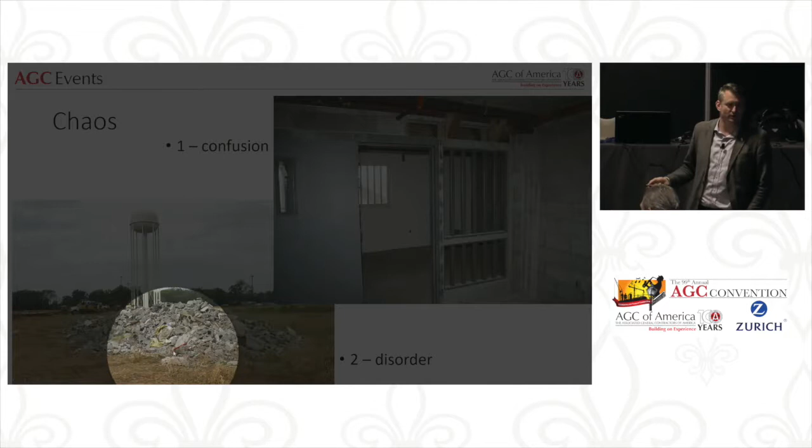Now, chaos is something that creeps way into every one of our projects all the time. So what are elements of chaos? Well, why in the world would you go and dump all the bricks out on the ground? So what is the chaos behind that? There had to be some reason behind all of that. And then to some degree, that's disorder, and then confusion, right? How was this really supposed to go in? I mean, you can tell by the bars, this is a prison, and so how this is put in is fairly significant, because if you do it wrong, somebody might die someday.

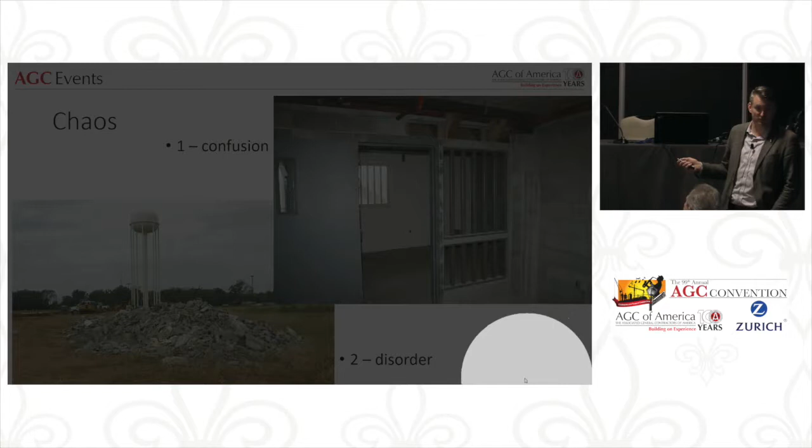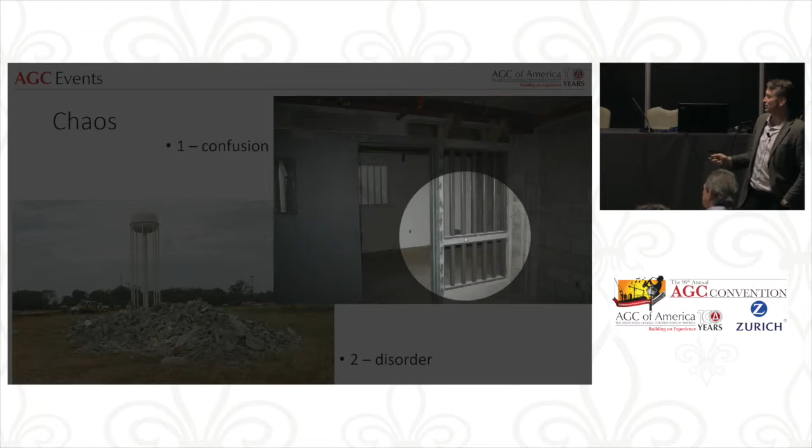So there, just what's happening that all this kind of gets left out and put together at a later date. In here, the simple part of the confusion was this window is backwards. The glass is supposed to be on the other side of the bars. And that's a big deal if that's a safe room. So if there's a riot in the prison, that's where the counselor and the guard hole up for 24 hours to get things under control. So yeah, it's a big deal.

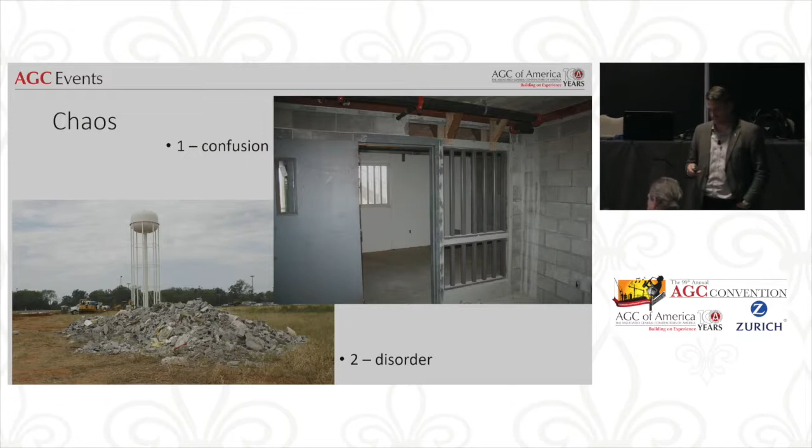So how do we start to get past the chaos and the ignorance? And really, I want to focus on the chaos and ignorance, because I want us to get that goal of having order and understanding, of being able to do things. So if you look closely, at first glance, you think that might not be what was desired. But in reality, that had to be exactly what was asked for. In this case, you had to have an owner that specifically wanted that window.

And how do they communicate that? How do you get that one-off thing in the building when you've got 40 or 50 workers that are all going to look at that? They're going to look at the plans and say that's wrong. They're going to look at the hole and say that's wrong. But that's really what was wanted. That takes order to be able to do those special things.

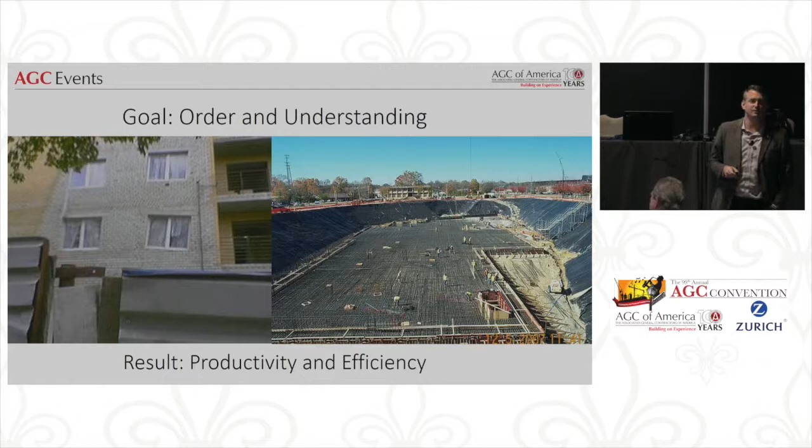And then productivity and efficiency. How much concrete are you going to pour that day? Are you really going to get away with a 6,000 yard pour? Are you ordered enough, and are you organized enough to put that together? And so in order to get to that, that's what we're going to talk about.

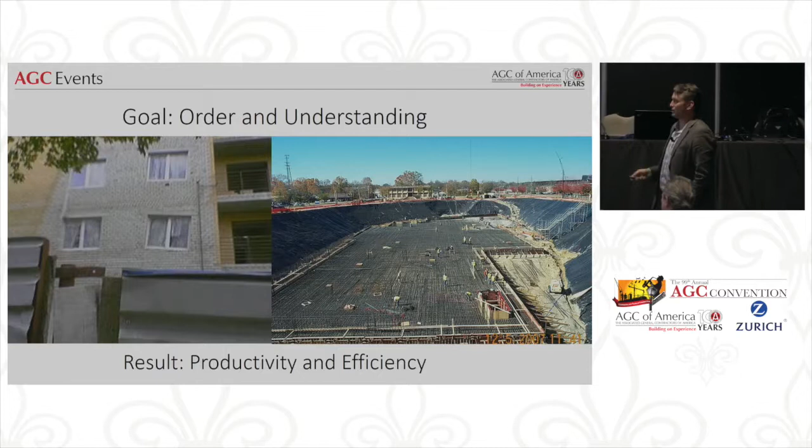We use BIM to increase our accountability, making sure everybody is getting us the right information. Now, how do we really do that? I want to address some of the little tricks and techniques out there that make the difference. We also want to increase general contractor and trade profitability. That is somewhat tailored to this crowd today, but it's also the general goal of all of BIM, VDC, Lean. That's what we have to be doing to make a difference. And how do we use BIM to avoid common legal problems of the past? That's also usually about avoiding chaos and ignorance. So those are the main goals I'm after.

Let's talk about how we go out there and build great buildings, whatever that role is. The company I work for does heavy highway, and we also do industrial. BIM is most applicable in a commercial environment, so you're going to see most of my examples from there, but it carries over into any element in which we are building, constructing, creating.

The architect, okay, that's usually one of the first ones. Others? The trades, subs? Any trades? Come on, where's the owner, and the trades are supposed to say the general contractor, right? We get in these arguments with each other.

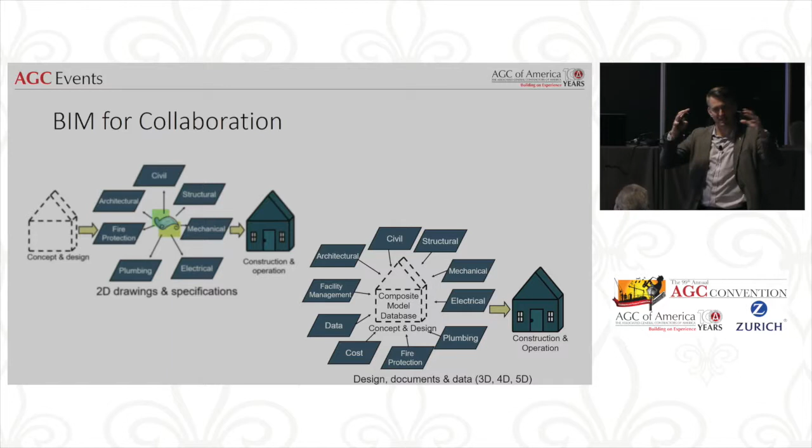Those slides are straight out of the AGC BIM classes, that's where those come from, and that's the guiding principle we're after behind all of this. So you can already see the idea of collaboration. When we take the distinct information and kick it out in different directions, we're already creating chaos and ignorance. We're separating this information and everybody's not together. So the idea is, let's start pulling it together.

But BIM is really a process that hopefully starts with some degree of schematic, and then you're hoping that your design team is actually authoring their design using the model. But there's a little step in there, and there are some diagrams I have to walk through for that.

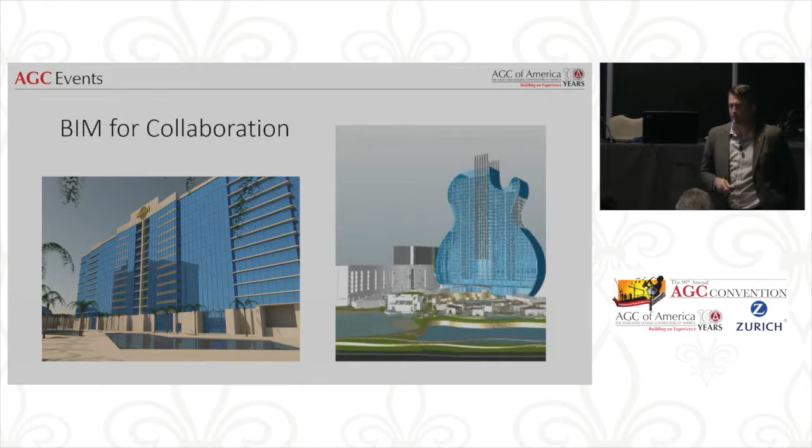We're talking about early on projects. If you have a vision that might not be easy to explain, or might be hard to truly understand what the product is, go ahead and model it. Now I found the vast majority of owners I deal with don't have experience reading plans, looking at plans, and getting a vision out of those plans. And so that means most projects need to be modeled, because that way they can actually see it. By modeling early on and creating that vision, we can easily reduce owner change orders by 50-60%, pretty easy up front, because they find this stuff early. And I'm going to talk about boundary of realization and things like that as we go.

Okay, here's a video that I'm going to play.

If we're talking about working together and collaboration on a project, if you're going to be stepping into BIM and you want to change the productivity in your job sites, you need to be doing 4D scheduling. If you're a trade contractor in here, you ought to be asking for it. You ought to be saying, do you have a 4D schedule? Do you have something to show me where this and how this goes together?

Because in the time it would have taken for me to even pass out half of the schedules for this project to you, to even pass you the pieces of paper, you already have a much better understanding of this project than most people would have ever had with paper passed out. You're already seeing the flow, you're already seeing how it's coming together. Now you can dig into this that much faster and easier, and actually start to truly understand a schedule.

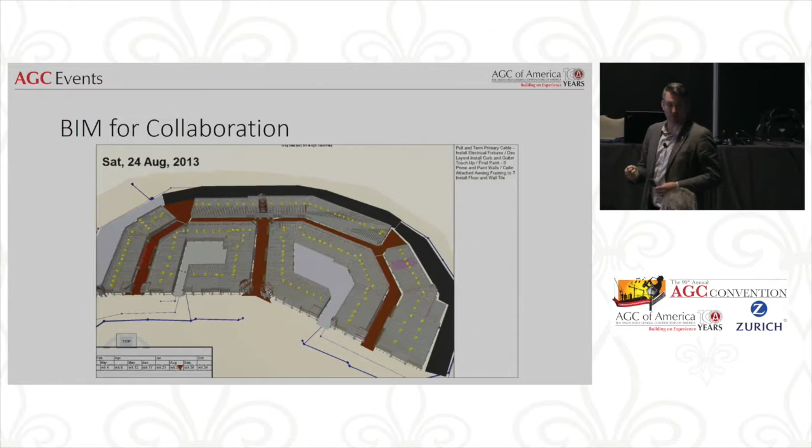Now that is a big part of fighting chaos and ignorance on a project, because most people on a project have no idea how their work relates to anybody else on a regular basis. There might be a superintendent somewhere, for that mechanical trade, who gets it a little bit, but this is something you can show every orientation meeting and get everybody out there understanding, at least in a general sense, what the flow and scope of the building is.

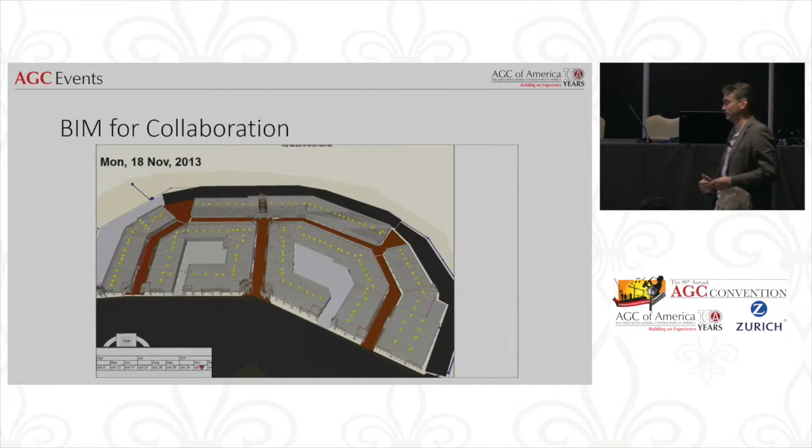So it's a really interesting study on how... This particular one is taking that same 4D schedule and taking snapshots in time and dropping them into VR, into an Oculus Rift or something like that, where someone can walk through and see what the project looks like at that point in time. Now we do this sometimes for specific clients, but we're looking to expand this even more. Some clients just need their building done. This particular client, we were coordinating on a major operating facility on a site with lots of stuff going on. There are times when this little road looks like an interstate.

And so we get to lay down here and build over here. A snapshot in time - what I did is I took a particular day, their known busiest day of the year, and showed them this is what we anticipate your site looking like on the busiest day of the year.

And what was the first thing they said? They came back and said, hey, that bridge isn't tall enough, the stuff we have to drive under won't fit. And I said, perfect, that's the exact sort of thing we want to know a year and a half before the project starts, not 2 days after we've erected this and something goes bump, because no one would have ever seen it on a 2D logistics plan.

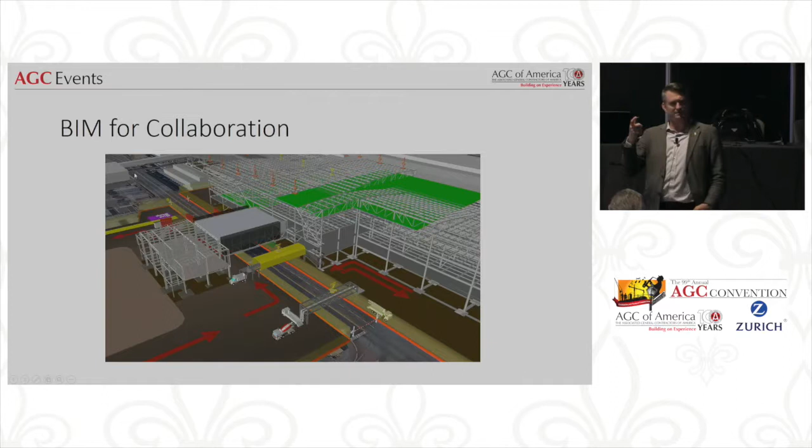And no one would have ever seen it here unless we dropped into that virtual reality. I was actually in virtual reality, standing on the road, walking underneath there, and said hey, that doesn't look right. And we got it taken care of.

So that's collaboration. When we get into trade contractors, so many people think BIM is just the architects and engineers. But when you start getting trade contractors and steel involved, this is coordination between structural steel and bar joists - two different companies providing two different things.

There was a bust in the height, right? So internal trusses, small frame members were not tall enough and would have put it all here, when it was really supposed to be here. But because of modeling - this had gone through a shop drawing process as well, but because of the modeling - we caught that before anything's fabricated. That saves a bunch of time and effort, because it's just better to catch it when it's virtual.

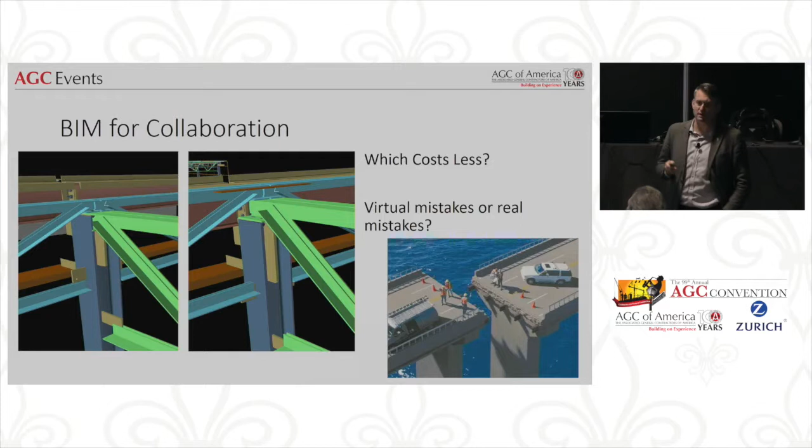But that involves pulling it all together. So this idea of collaboration, it's got to be all of these groups coming together to really make it VDC and to make it work.

And that's part of the difference with BIM. BIM is often viewed as that product - oh, we have a model, we're great. And I often use the analogy - I didn't even put it in the slides this time, but I usually do it - having a model is like having a treadmill, right?

You have a treadmill, does that mean you're in shape? I know lots of people have a treadmill and they don't ever use it. I know lots of projects that had a model and they don't ever use it, and it doesn't do them any good. So the idea is to try to pull all of these groups together and center them around the idea of virtual design and construction.

So that's the idea of taking this accountability and pulling it together. Let's walk into that a little bit. If we're going to fight ignorance and chaos, one of the big results that comes out of that is accountability. Who is providing the information? What information are they providing? When are they providing it? Walking through all of that sequence starts to become very significant and very important.

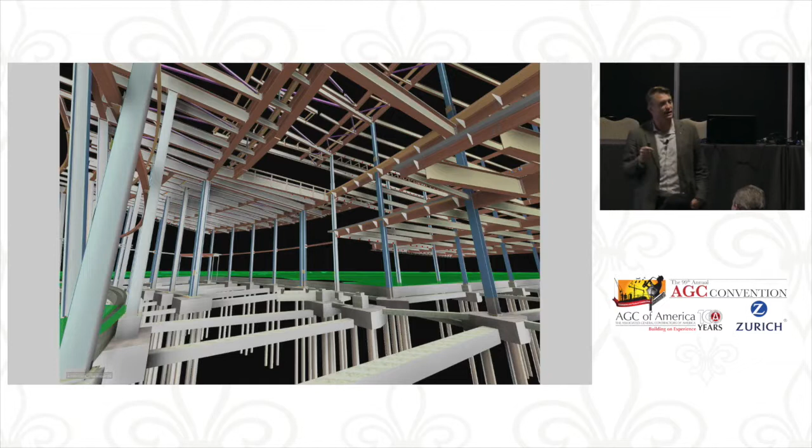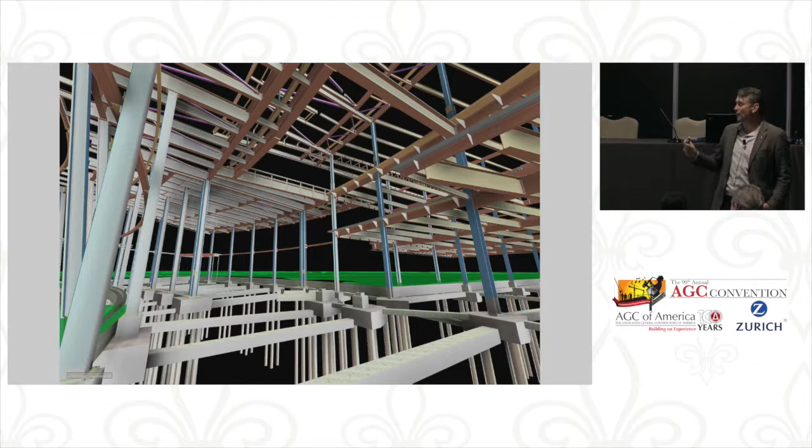On top of that, I am dropping a structural fabricator's model. Yes, I had the structural engineer's steel, but to be accountable, I want to see how the structural fabricator interpreted that. So I drop it on top, and now I'm talking about anchor bolt locations for a concrete guy, making sure that's coming together.

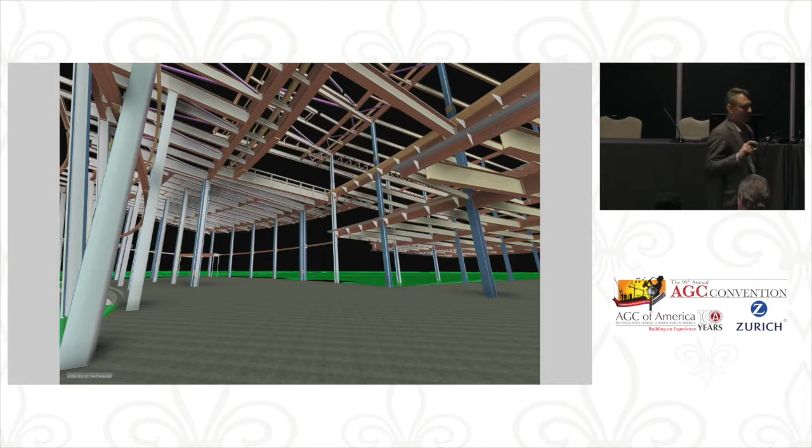Next step, put a slab in. Usually not too difficult, not a lot of thicknesses here, but I have seen models save people's hide on the classic issue of quarry tile in a kitchen. Because the architect always shows quarry tile in the kitchen, and how often does your structural engineer actually go into the slab and show the 2-inch recess? Then it gets poured without the 2-inch recess, and the jackhammers come out, and everybody's mad at each other because there wasn't the communication.

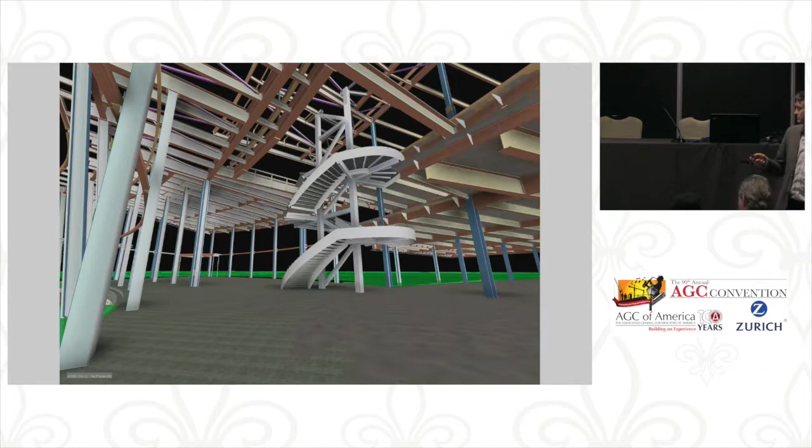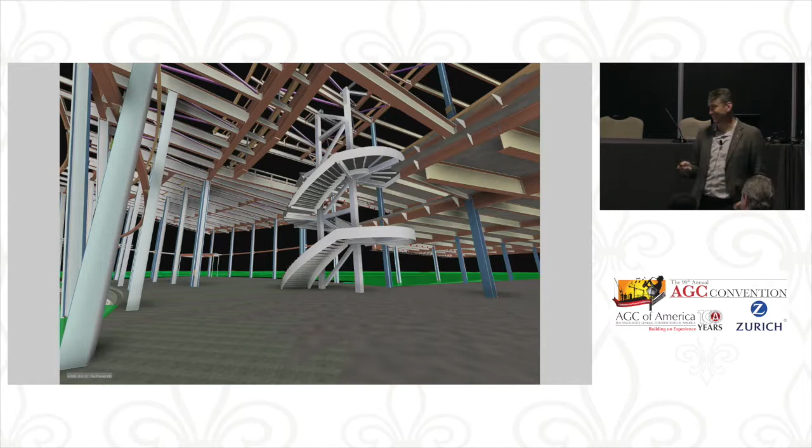Next item, there we go. This is a different fabricator. The circular staircase comes from a different fabricator, in this instance, than the structural steel did. So we want to make sure - a miscellaneous metals guy, it doesn't seem very miscellaneous, but it was miscellaneous metals.

Ductwork - actually the fabrication, not the engineer's model. In fact, the engineers on this project, structural and architectural models were provided from the design team. No MEP was provided.

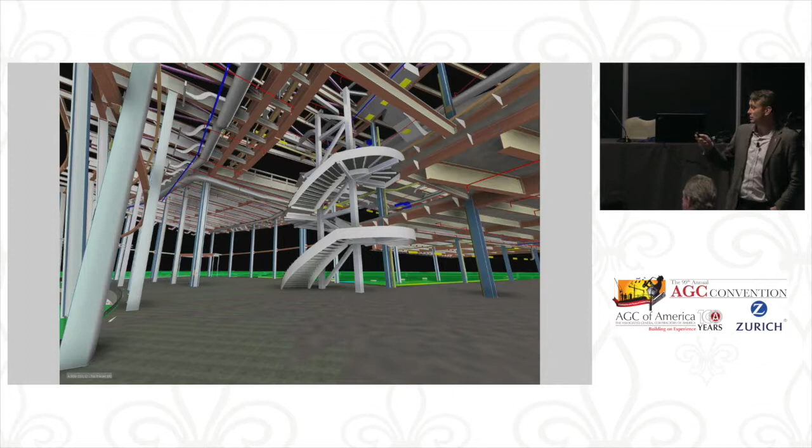So we just went straight to the trade contractors to get all of their models. There's your fire sprinkler added in, electrical, and then your curtain wall, which on this particular instance was a very significant factor. Modeling the curtain wall made a big difference. It was interesting on this particular project, the structural engineer, someone was saving some money.

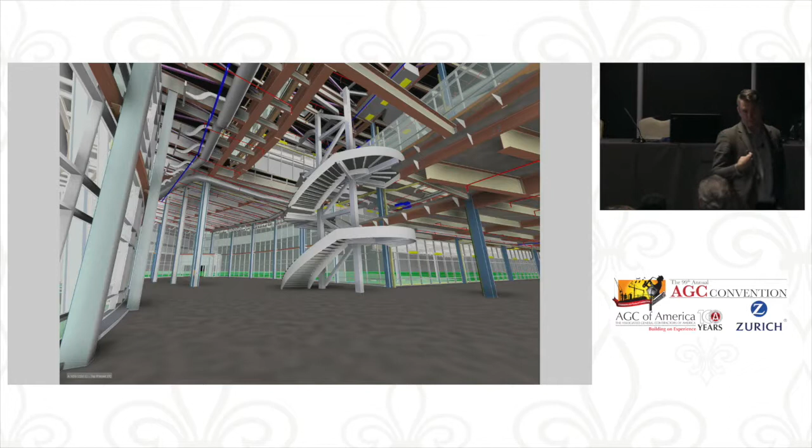So what they did to save some money is they were attaching the curtain wall to the steel. But when you attach the curtain wall to the steel, after 4 or 5 stories you have this expansion that takes place. So they put in a horizontal expansion joint all the way around the building. Has anybody in here seen that before and built that? I had never seen it before, I had never built it before. It threw some flags when the modeling happened.

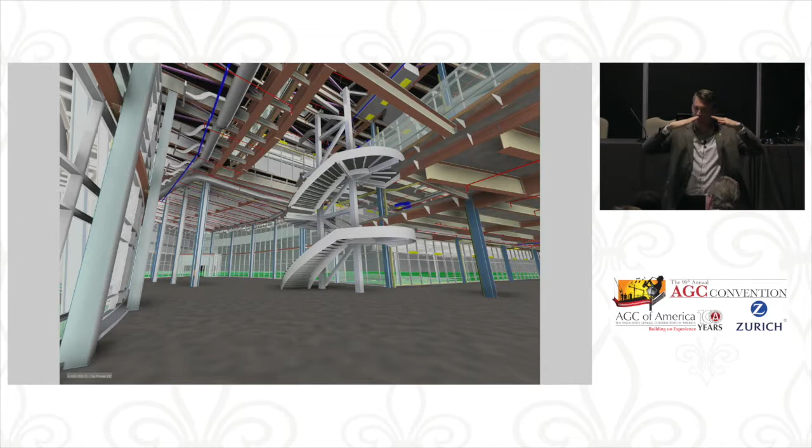This had been in the plans, and nobody really questioned it, it's just an expansion joint. Turns out you can't do that with curtain wall. There's no known way to do that. So we had to come back, pull that out, redesign, and put in extra steel that accounted for the horizontal attachment, and that's what the expansion joint was attached to, the beams that went around the edge of the building. And of course, beams at the center of spans, you have to allow for deflection. Well, curtain wall, even if you put the joint in there, you can't deflect glass. It goes boom, and so that was a big deal.

This particular project, we had the laser scan, but not as an as-built condition. I do not promote that. If you're talking about the future of BIM, right, I want to get it right when it first goes in. If I'm laser scanning to see if it's right, well, I've already killed my productivity. I've already put it in wrong, and now I'm finding out it's wrong, and now I'm fixing it. That's no different than what we used to do.

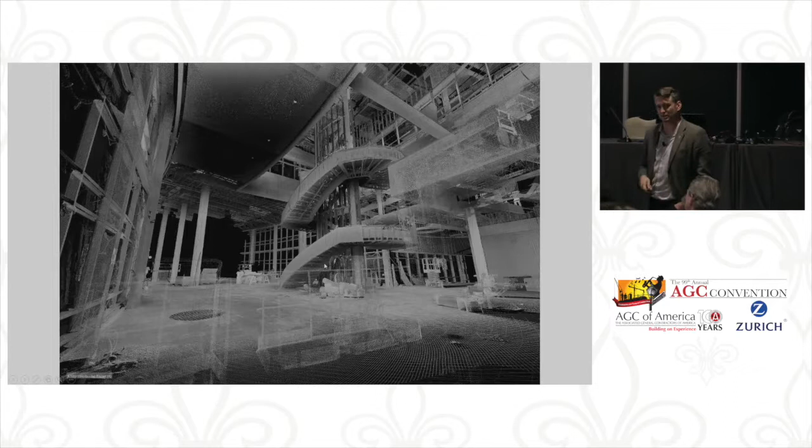What I want to be doing is using the models, and I have some slides addressing how I think that's a better way to do that. This particular one was scanning these studs to put the fancy fiberglass coating on them, which made the stair tower really neat, you'll see that in just a second. But they had a little trick.

So a trade contractor here, they were trying to play off the chaos on a project. What they would do is say, we have to have our attachment points for our fiberglass panels accurate within 1/8 of an inch, knowing that the tolerances for all of this is 1/4 of an inch. So they knew that the tolerances would never be met, and they'd never know what it was, and they could then always come back in and prefabricate a bunch of panels.

So we laser scanned it, and we gave them the models, and we told them, we laser scanned to a density that provided all your tolerances within 1/16 of an inch. Here you go, here's every measurement you need within 1/16 of an inch. And that's how we found out they were playing a game. It's because they'd already fabricated a bunch of the panels, and then they tried to come back and say, no, we gave you your tolerances, we gave it to you. And they'd just been doing that. So they weren't very happy with us, but they'd been kind of gaming the system.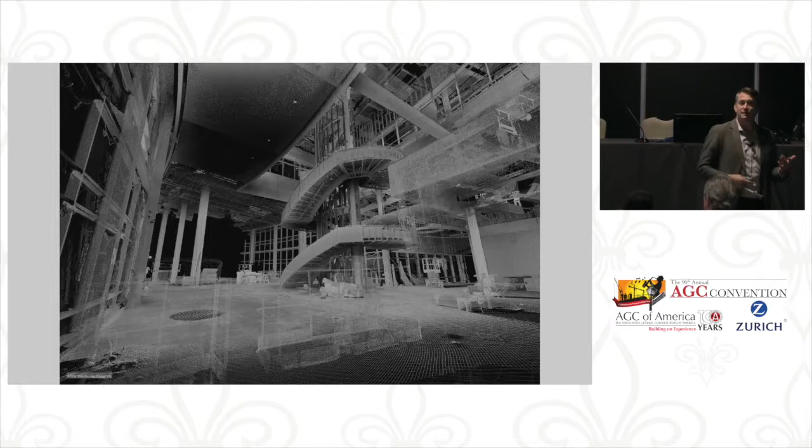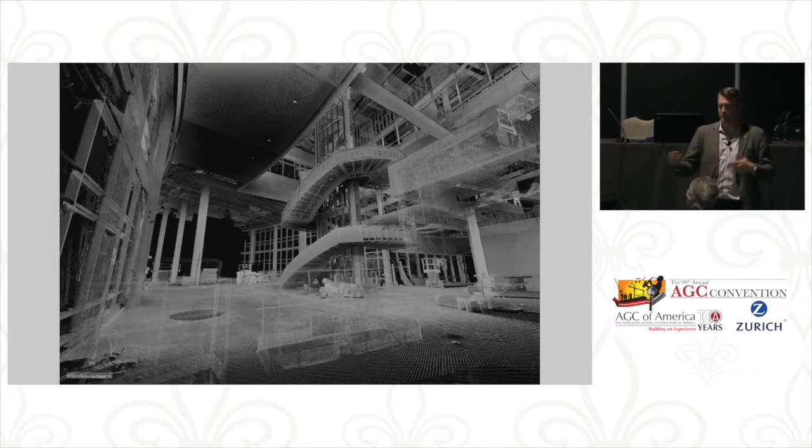Their regular mode of operation was about 50% waste on fiberglass panels. They would just produce them and then reproduce them. That's the exact waste that I want to reduce, get rid of, and make our projects cost less. So when we're said and done, that's the product we're producing. And you can see that stair tower is really pretty neat, it's a pretty fancy deal.

So now, that's part of the accountability, is how do we get all of those individual partners. I went through that, I talked about a couple different trades and making sure we have their information, their interpretation, and it's right to go in. So the idea, and workflow is very important, people skip steps all the time. Even my own folks within our company, I've got to walk them back through it.

Okay, if we're doing this right, the architect, we want that architect doing a model-based design, not creating a model for drawings, right? Because if they tell you, oh yeah, we have a model, here are your drawings, it's like, well, I want the model.

Well, we don't know. That means they haven't been reviewing the model. That means they don't even know what's in the model. And that happens on a regular basis.

You've got to be talking to them, and we've got to be moving our architects as a whole. That's why I come do these presentations. If every one of you go back and talk to your architects, that's 120 conversations less I have to have next year, right? So go talk to them.

We want model-based design, where the model is authoritative. Now, oh, it's not a contract document. It can be—they just have to get over that. And it can easily be. All that can be taken care of. But the architect doing a model-based design.

Then we want civil to be doing a model-based design. Now, how often can the civil guys come to you and say, oh, we don't do BIM? Wait a second—like 80% of the civil market uses Civil 3D. It's a 3D model. It's already there. Don't let civil people tell you, oh, we don't do BIM. Yes, they don't use Revit. That's okay, they don't have to use Revit. You just get their Civil 3D in a 3D format and you're set. So ask them for model-based design as well.

It's circular, right? You're going to run these through. You're going to get them in pieces. You're not going to wait and do the entire project. Pick the area that's first on the schedule, run it through, get it coordinated, move to the next one. Some systems, like fire sprinkler, always have to bite off a little bit bigger chunk because there's hydraulic calculations and sizing pipe and everything. But they're used to that. They'll be okay.

All right, so when we start going into this, you can have a simple disclaimer from the architect on their model. And I implied this a little minute ago and led to it: no warranty, express or implied, fitness for any purpose, or that the digital model files will be usable or accurate.

Why? So what are they doing? They're actually, okay, so let's be collaborative and let's not have the tug of war and sit here and poke fun at them like we always want to, right? They're doing what all the software vendors have been telling them to do for 15 or 20 years: use the model, produce your drawings, because your drawings are your deliverable. That's what you're contractually obligated to provide. That mentality is wrong. We need to start changing that.

They're not contractually obligated to produce drawings, because if that was only the obligation, they would just provide us with a title block and a little circle that says build here. No, there has to be a level of quality and coordination information in those drawings. And so the model is a more effective way to produce that. We just need to get them doing that.

So these disclaimers are a great example. If you get the disclaimer, you know you're not quite where we want to be yet. And I would say only about 10 to 15% of firms in the U.S. are at this state. So if we start talking about the future of BIM and VDC, I want to see reliable models coming from our design teams, where they're actually using the model to design. So if you go to Autodesk University, they're going to talk about generative design, where the computer is basically designing it. Well, then you know it's reliable, as far as the programmer goes, but we'll see.

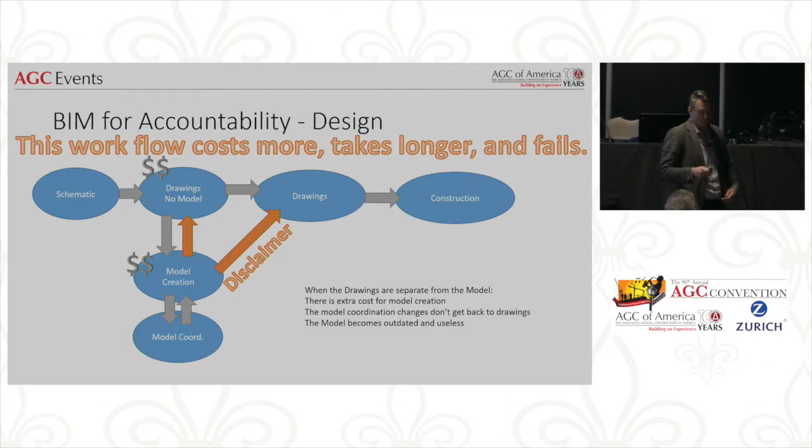Because they'll make all of these changes, we'll do all that coordination, that process I talked to you about, but none of those changes—no one ever looks at the model, then goes back and fixes the drawings. And so it falls apart, and that's what the orange arrows are. The disclaimer is a good indication that that's what you're looking at. So, that's Wile E.

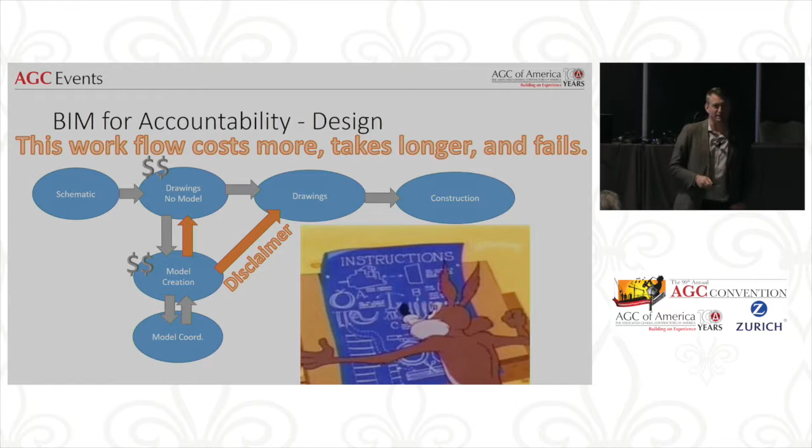Coyote stage planning, and we know how well he does at everything.

Now we have architects and engineers that are getting a little bit better. They're making the next step, actually creating the model, and you can see they're not spending double the money. So they're actually making themselves more productive.

They're creating the model, and the drawings and the model are almost the same thing, but they're still issuing a disclaimer, and that comes back because they're not reviewing the model. They're building the model, creating sheets, handing the sheets to the principal of the firm or that senior designer, the senior architect, and they're reviewing the sheets. Yes, this is a quality product, a quality set of sheets, and they send it out the door, and they will give you the same disclaimer.

So then what happens is we get here and it fails, because then we start doing coordination and we come back to them and say, hey, I noticed in your model that all your toilet paper dispensers are halfway through the floor, down at that elevation. They're like, well yeah, but that doesn't make a difference, it's just in the model. It's like, well, but we're intending to build off of the model.

No, you can't use a model for anything. Okay, well then we were going to coordinate off of this. Well no, we know that all the diffusers are at the wrong elevation. It's like, well, can you fix it? Well, no. Okay, so that's another sign. The disclaimer is what gets you there, so watch out for it. That's where this one fails.

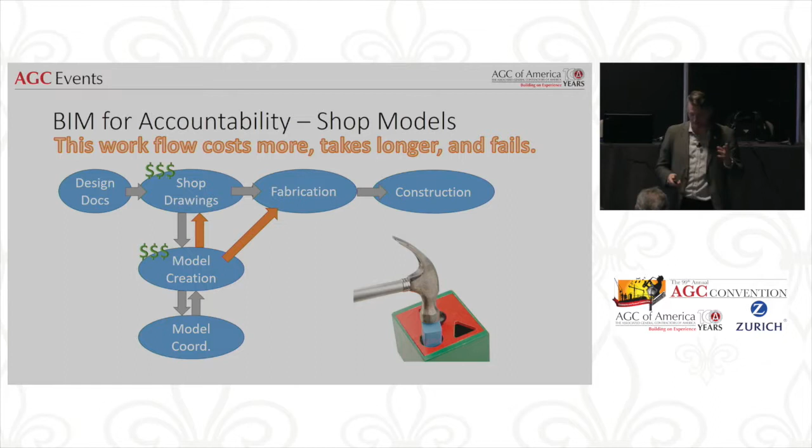So shop drawings, some of you might have used models or not. If you haven't spun models around, it is very hard to pull dimensions from the model, because you're there looking at it wondering am I really hitting straight to each other, am I really at the closest point? Some tools will tell you closest point, but it's really hard. Whereas a set of shop drawings or actual construction drawings, those lines are very clear, they're called out, it's easy to build from those.

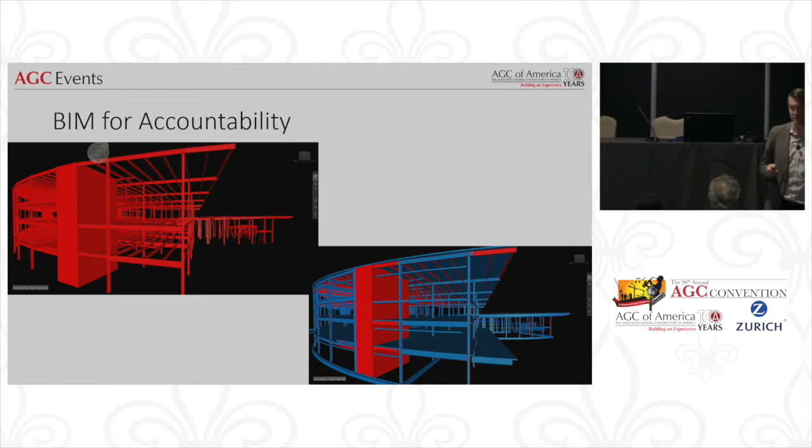BIM for accountability, another one here. How are we making sure everybody fits and everybody works? The design was fine on making sure everything fits.

This is a research lab, and they had about 64 ovens at any given time in here testing ovens. If you've ever done a kitchen hood, here is about 32 kitchens all backed up against each other with all the associated ductwork. On this particular one, there was a big fight early on: model the hangers, model the hangers. No, we always just put the hangers in, we always just put the hangers in. When it came down to it, HVAC was fine.

Electrical, by the time they hung lights in between all of these hoods, there was no clear path back up. The only way to hang the lights was to use the same hangers for mechanical and electrical. Those are two different contractors, right? So now they have to cooperate and work together. And yes, they had to upsize the hangers from 1/2-inch rod to 5/8 inch rod. Had they not done that ahead of time, we'd have had a disaster on our hands. So that's accountability, making sure everybody's information is in there and we have everything.

So that idea of pulling this all together is what makes the difference for making us more productive and efficient on our job sites, because we've built it one time first.

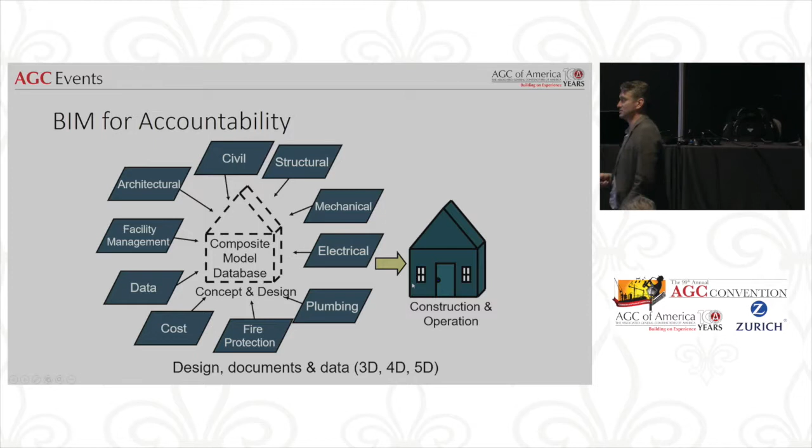Think of this when you're buying software, okay? And I've got this well disseminated through my company now. I don't get people calling me saying, hey, I saw something cool. At least they say now, hey, I saw something productive, I saw something that'll make us more efficient, but I've got all the cool shut down now, which I'm very happy about.

Hopefully some of you have seen the MacLeamy curve. It's this idea, this was created for design. The idea that in the old process, the majority of design decisions were made during construction documentation. At that point in time, your cost of making a change versus your ability to actually make changes hit a crossing point, a critical point. It just costs too much then. So what BIM does, not necessarily even VDC, just BIM, is it moves these decisions up forward.

If you're doing a design build project, you used to have that great billing cycle we get from architects and engineers: 20%, 20%, 40%, 20%. Be prepared for them to go 20%, 40%, 20%, 20%, because they're doing more work early.

Another thing I've seen when they switch to BIM is all of a sudden they're spending all this money and having to bill 40% here. Lots of times some senior executive will come in, look at their cost curve and spending curve and say, the project's out of control, there's too many changes, it's all a disaster, kill all this BIM stuff, we're going back to 2D. What did they just do? They spent all this money to get to here, and said, scrap this, we're going to go back down, and now we're going to go here, and they've just doubled their cost on the project. Not because something was going wrong, just because they didn't know what was coming. If you can eliminate that little bit of ignorance, that's going to help you a whole bunch.

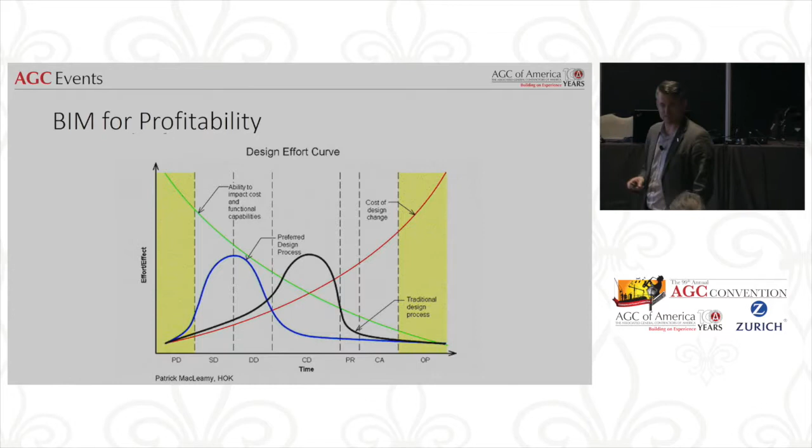So what if we take and drop this back to construction? That was an architect's view. Let's look at a contractor's view. Same thing: our ability to actually make a change on the project is going down as we come across, and the cost of making those changes is coming up.

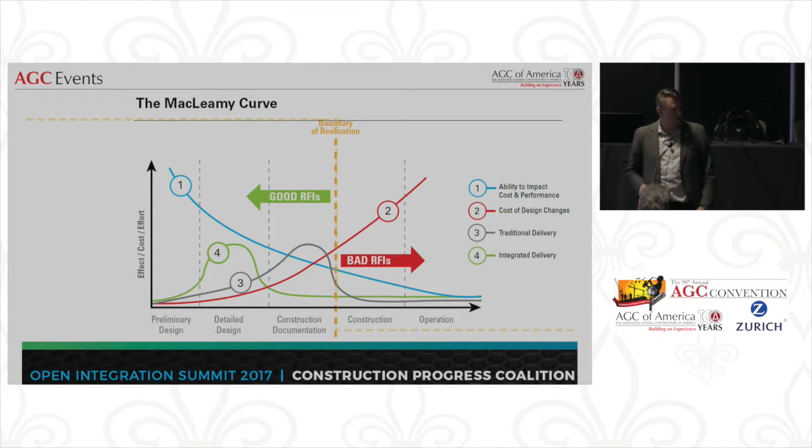How many contractors or trades have been accused of overcharging the owner for change orders? Because it cost a lot less to do it here than when we had to do the change. We're not gouging them, that's just the way it works because it costs more to make the change later. This curve has helped me in that conversation too.

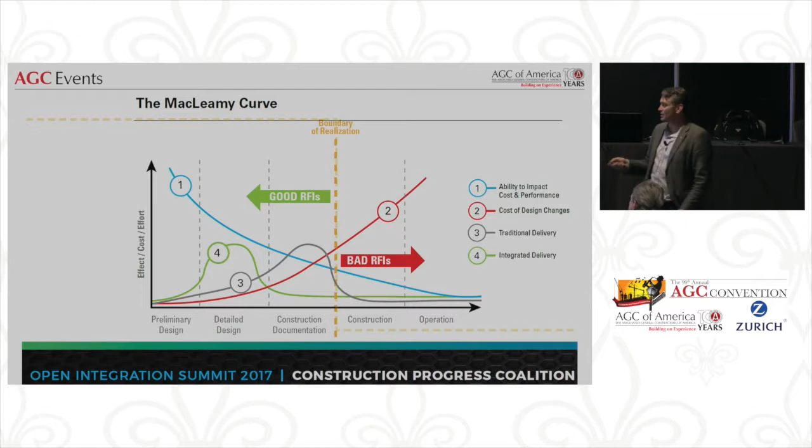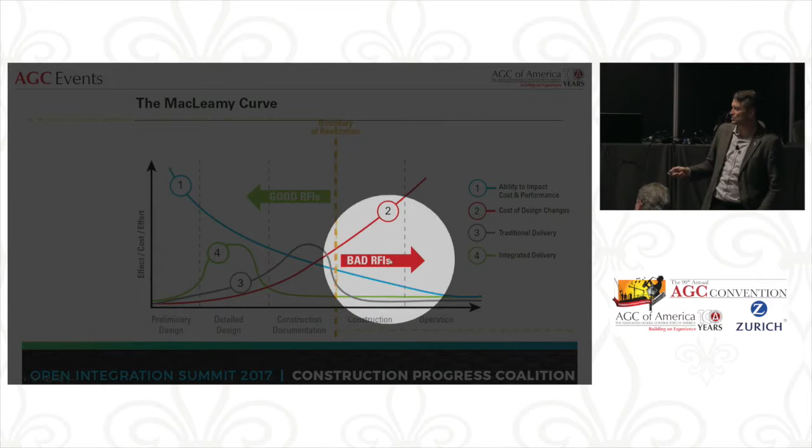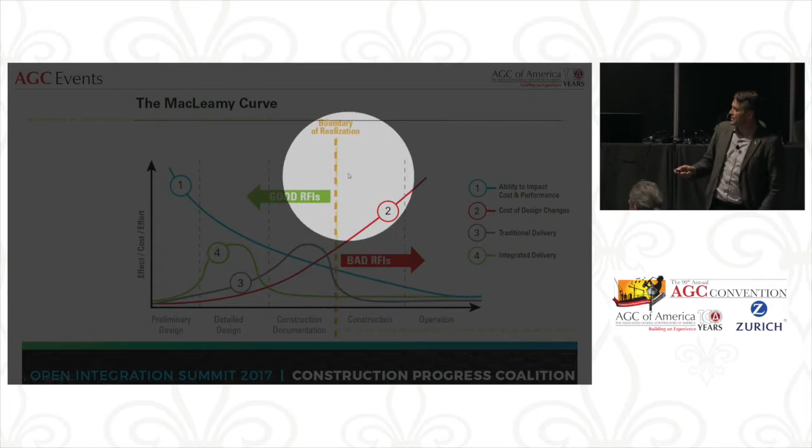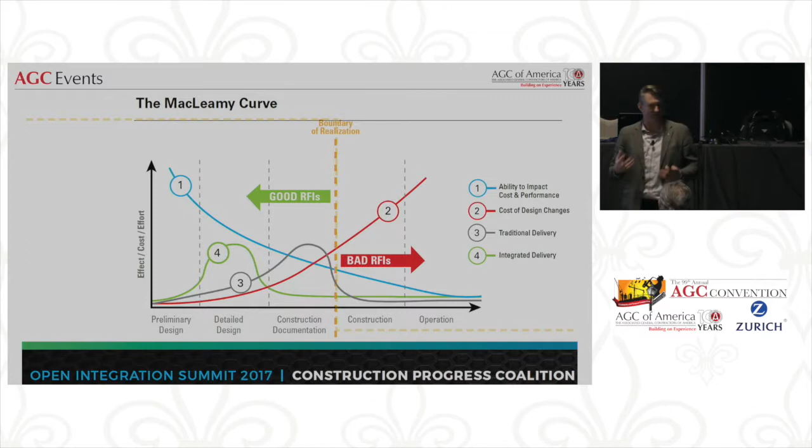What I want to talk about here with this curve in construction, you can see how we arch this—this even really needs to carry over here, because if you start talking about submittals and shop drawings and everything, I've promoted that they take this arch, and a lot of decisions are even made halfway through construction. This boundary of realization is something to consider—that moment when no longer is it an idea, no longer is it a concept, it starts becoming physical. Because when we have to physically change things, that costs a lot more money.

So let's think about this boundary of realization a little bit. You have an informal boundary during the design process where all the questions up here cost you almost nothing. But once you start documenting it and putting it into models or plans, now it costs the design team more to go back and change it. That is an informal boundary of realization.

Because it's not totally real, but it's recorded and it's distributed. Watch for that. Your formal boundary of realization, once again, is construction. I pulled these straight from the Construction Progress Coalition to show here today, but I wanted to have that conversation because this idea makes a difference in the profitability of our BIM process.

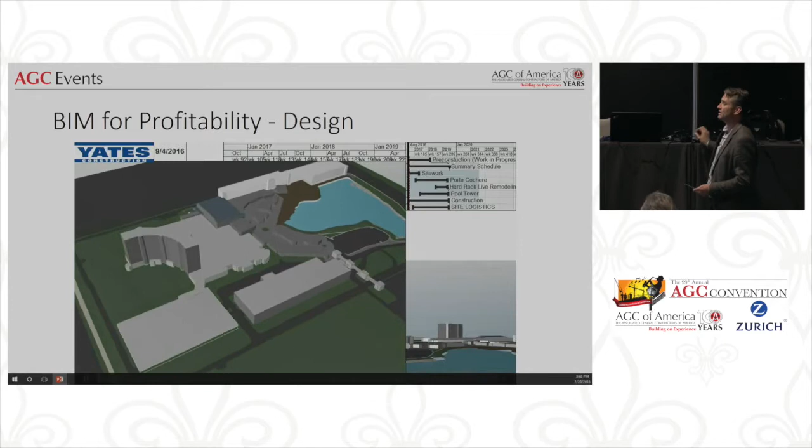So when you start looking at it, you start taking a design and figuring out how we're going to coordinate that early on. Because even when we're in the design process, if we start taking the design information and putting it to a schedule, now we start to communicate it to an owner—how is this coming together, which areas are being shut down, how is this all working?

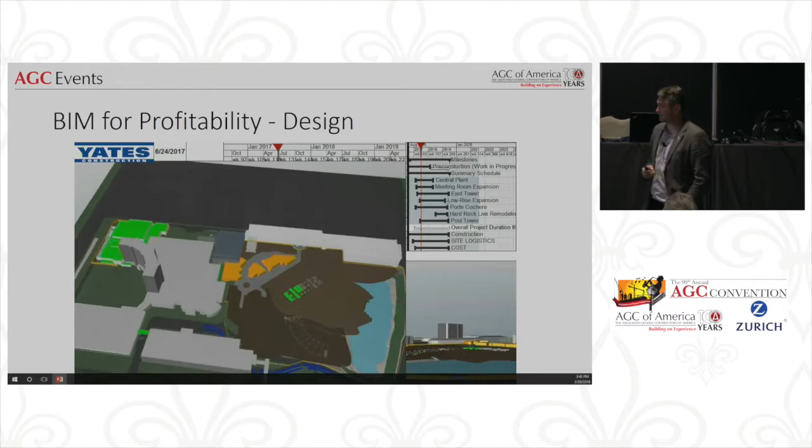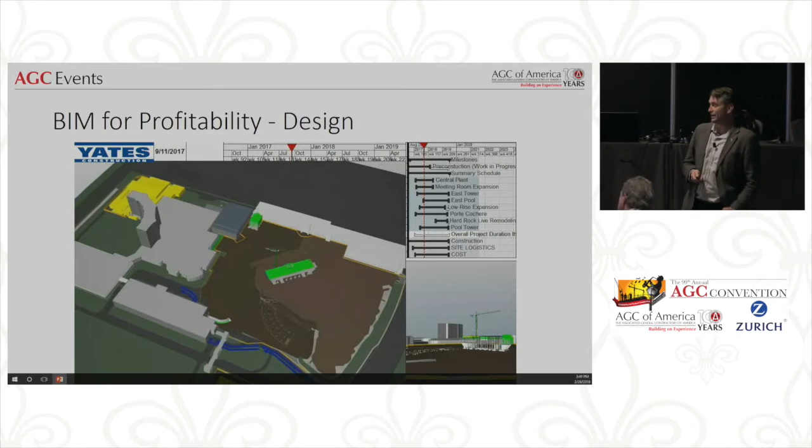You can also put a cost curve to this, which helps with the bank. You show the bank what it looks like when you start tapping into your loans, when the cash is depleted and you're coming to them. Things like that go a long way toward pulling this together—being able to coordinate authorities having jurisdiction, traffic patterns, and the trades, making sure this is all pulled together. This process is what you're after.

Very specific, targeted. If we are trying to get in there with our trades and we have something like a flash condensate tank that has to be replaced, being able to come into... Oh, it played. All right.

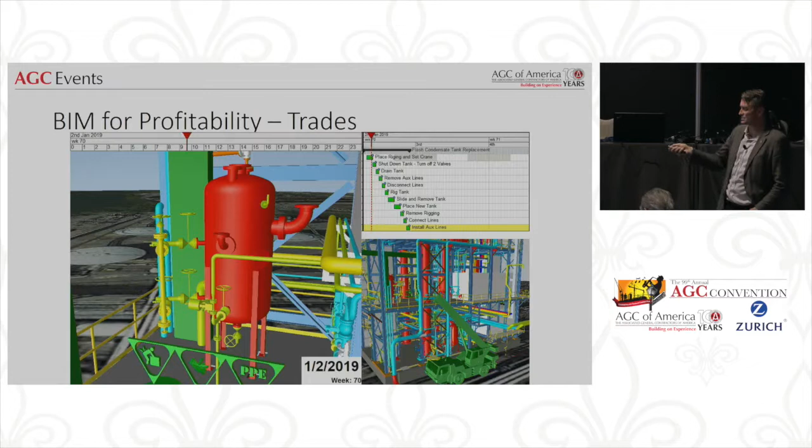You have project start, mobilization. This is a day. We've actually put our safety icons in there as we're reviewing this with the trades so they know lifting. Don't try to lift this. This is a 2,000-pound tank. That guy, there's always somebody who says, oh, I'm going to help scoot it. You don't do it. Let the crane do the lifting, okay? But talking about those safety icons and then walking them through the sequence.

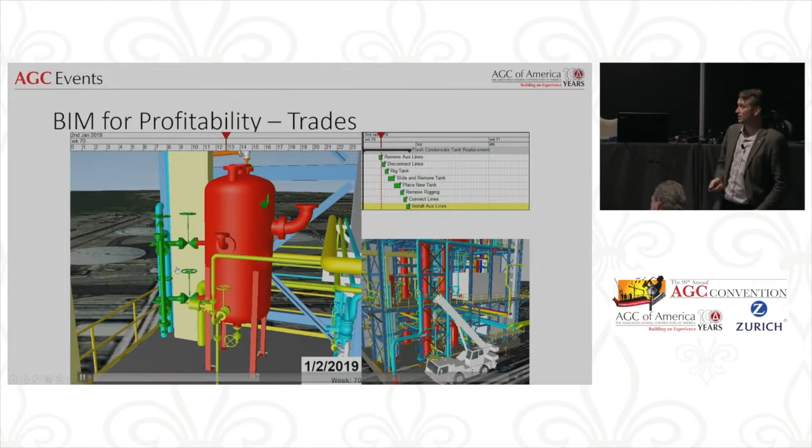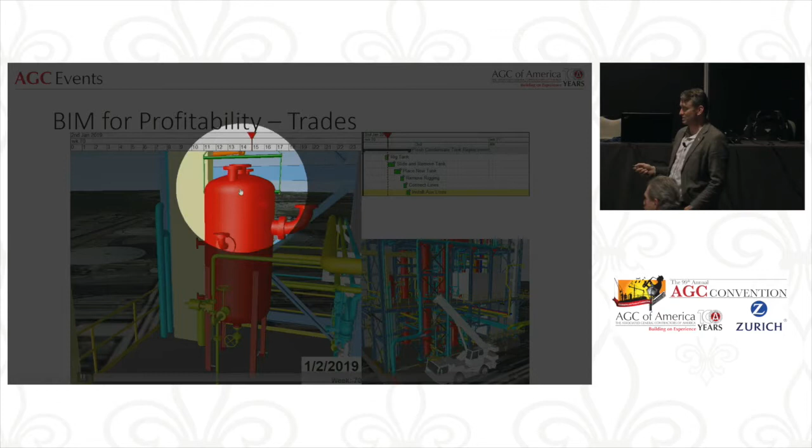You can see either drain the tank, remove the auxiliary lines are in green. But then walking through disconnecting the actual main connections, aside from the auxiliary lines. How are we going to rig it? Actually having a decision and conversation and discussing what points do we need. And then actually being able to slide it out. Do we have a plan?

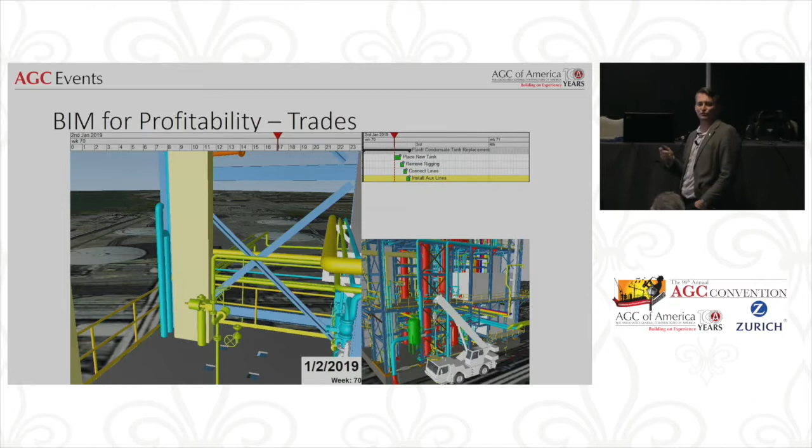It might not be perfectly represented there. It might not swing just like that. But at least we have proof that it will fit. And we've actually used a physical representation to make sure that happens.

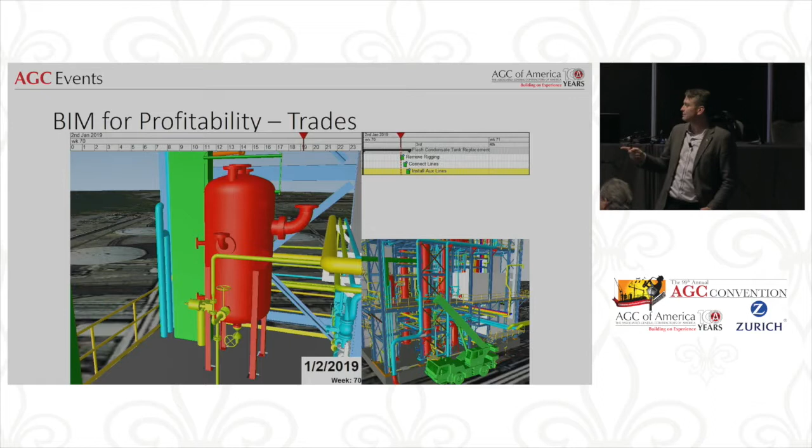Now this starts to really change productivity in the field. Because now, nobody commented, but that thing bounced. But we can play this over and over again, and we get the trades to go over it. We can go through this a week ahead of time and get a foreman to say, no, there's no way that we'll be able to do that because it turns out that there's another pipeline that wasn't in the model, that's not even there. Well, thank you—we put it in the model, we get it fixed. We get it done right. Those are the things that we're after.

So if we're going to take all this and try to be claims free, because that is a big waste within the industry—the money that trade contractors, general contractors, architects and engineers put into their project, because we have to be profitable businesses. We have to stay alive, and knowing that these claims are coming, we have to put some money in there to be able to cover them at some point in time. It would be great to be able to slowly eliminate that and pull it out.

So having a good team is one of the first things. Maintain schedule, be proactive, be fair. What it all comes down to is no surprises. That's what we've got to be—open and communicating, working together on it.

So having a good team—this is the team, it's everybody, right? So yes, having a good owner is a part of this. There are projects that I've seen us elect not to participate in because we knew it wasn't going anywhere good. We transfer those projects to our competition. The team here, the design, coordination team, your modeling team, that's design and your trade contracting team, and then the actual team that's out there putting in. That makes a big difference.

That early coordination of the team—aligning those points, making sure that we know where things are really going to sit in relation to each other. If you're doing BIM and VDC, an early point that you need to do is some sort of a naming convention, so that's the name of a file. Right here I can tell you this is the Volvo project, building 140. It's level 2, area A2. It is the structural fabrication model, and it is created by Schuff Steel on that date. I don't have to open the file to figure any of that out.

Naming conventions are absolutely necessary, mandatory for a good VDC process, but wouldn't this help you on daily reports too?

Wouldn't this help you on any files that you name on your project to be able to put the project name, the location it came from, the contractor who provided it, the date it's from, all those sorts of things. As a fun side note, that's one of the hardest things I get people to try to do: year, month, day. It's so simple, but they all learn as soon as they're on a multi-year project and all their January files are lumped together and all their February files are lumped together. The teachers at school with my kids always look at me funny when I write 2018 February 14 on stuff, but I just make it a habit.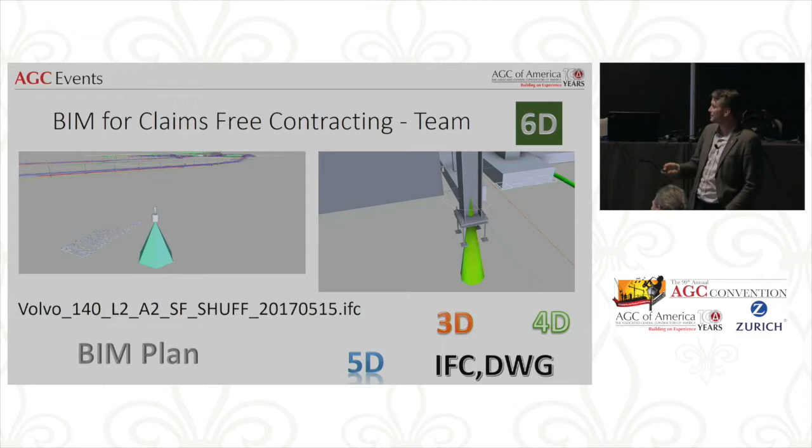Making sure that we manage our schedules of information, the information that's coming. If you get into BIM, at some point they're going to want these links inside the model where I can click on a dry type transformer and that link takes me directly to the website and I see the O&M information. But this has to be done early. If you wait till the end of the project to do this, it's going to be costly and painful. That's why I have it under the schedule side. Timing is critical on things like that.

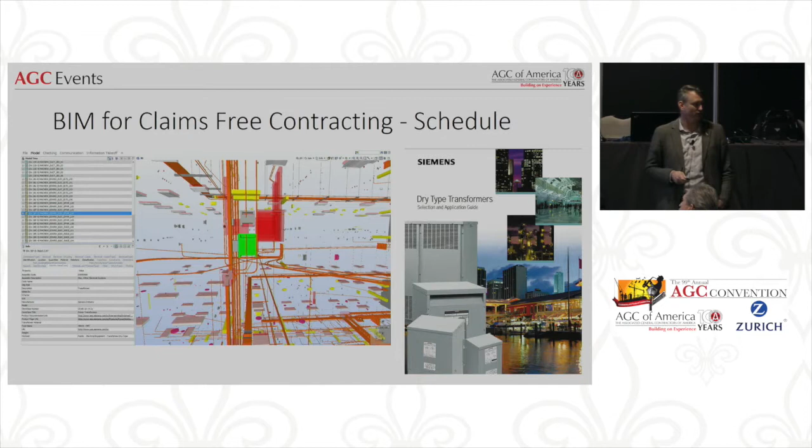Getting it done early enough and actually coordinating the quarry tile. Here's quarry tile coming out to go back in two inches higher so that it has the slope so all the water runs out of the freezer when they defrost it. Simple things like that.

Coordinating this one, clash detection, simple clash detection. But you start to say, well, why don't architects and engineers do it? In this particular instance, that footing is clashing with a landscaping drain. Not many people are coordinating their structural engineer with their landscaper.

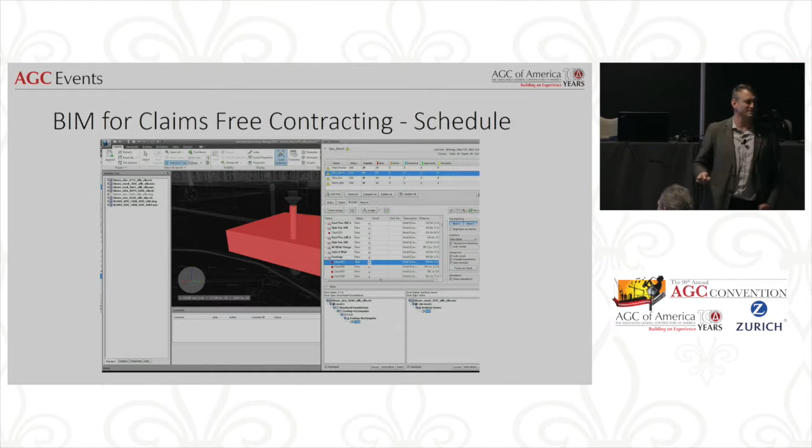But getting more into the model helps your schedule, because otherwise we'd have been out there doing landscaping at the last minute. We're really trying to get everything put together and the building turned over for Black Friday, because if you don't turn the outlet mall over for Black Friday, no one's getting paid. That's what it comes down to.

Being able to ask: how quickly can you turn around an estimate? How quickly can you find out what changed from one revision to the next? Using tools like that to be able to highlight and see what they changed. Or being able to drop into a model and say there are four of these - where are they? They're on the schedule.

One of the best examples was a project with two light fixtures on a 290,000 square foot building, and on the lighting schedule there were these two specific light fixtures that no one could find. It turns out the electrical engineer had them on the schedule, but they hadn't been marked on the plans. They were in the model though, and we found them, and that was very helpful.

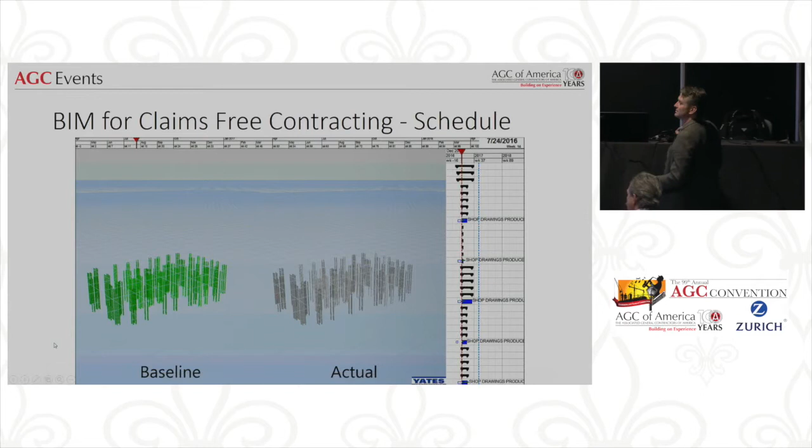Here's another one, a quick video. We talked about communication and collaboration. In this video, I'm going to skip ahead a little bit. If you'll notice, this is baseline to actual comparison. You'll see what's the best thing about this video?

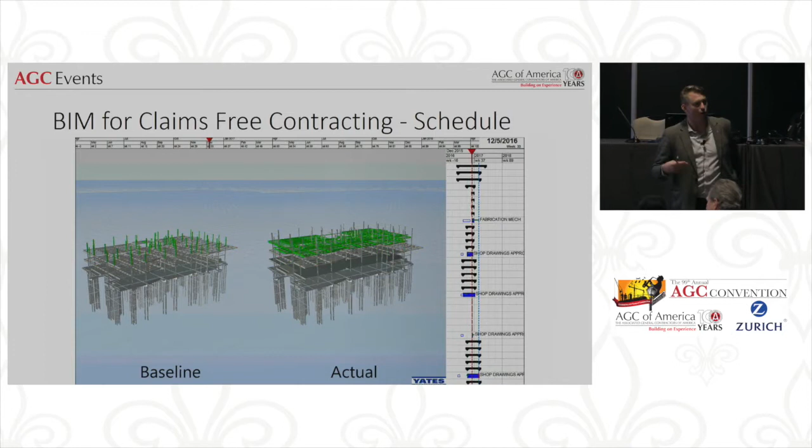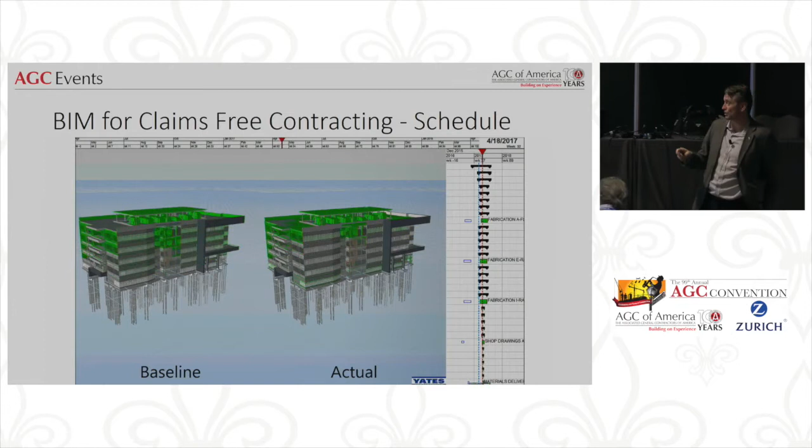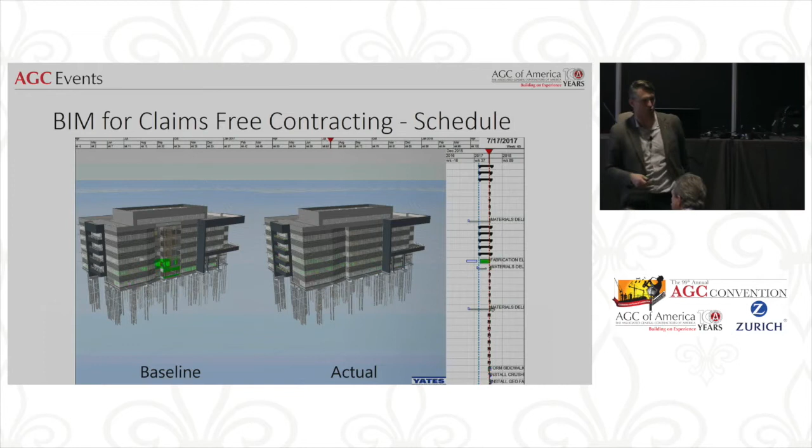The project's ahead of schedule - the stuff in the actual is happening before the baseline. Communicating that early and making it highly visual so the owner understands we are ahead of schedule. Later on when the rest of the building's baseline overtakes the actual, which really starts to happen when we get to curtain wall, especially the major curtain wall around the back, then you have that conversation - and it's so much easier to have because the nuances are gone and it's visual, and you can really talk about your schedule and how it compares.

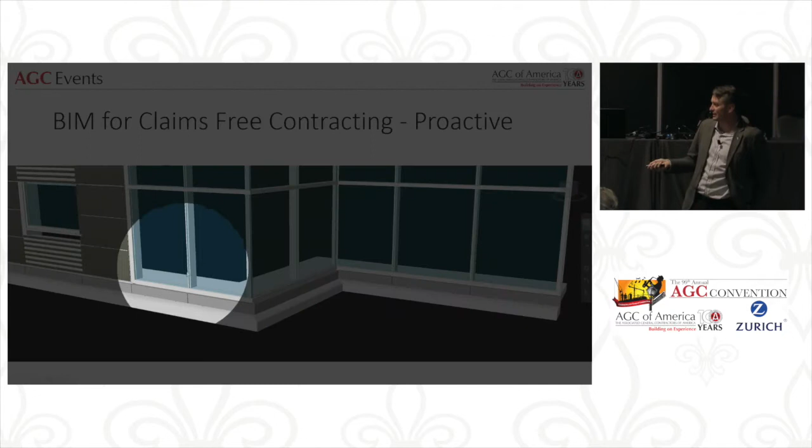Being proactive: on this particular project, we went into an area of the country that hadn't done any BIM before, hadn't done any VDC, and we knew we needed to do it to help the owner. So we started classes talking through it, and we did a mock-up - we were due a mock-up, we had to provide a mock-up. The concrete guy, the curtain wall guy, the metal panel guy, the louvers - all these different groups started asking, well, what am I providing for the mock-up? First thing, we're going to model the mock-up.

And we're going to use the actual dimensions from it. It walked us through the whole process with a whole group of trades that had never done it before, on a nice little small thing that was easy to get their head around and easy to change.

Coordinated origin points. We did the whole process all the way through. And yes, there was some humming and hawing and grumbling, and I even got cussed out once because this seemed like a whole waste of time until they saw it and they got it. And then when we actually went and built this mock-up and resolved project issues using it, it was very beneficial for everybody.

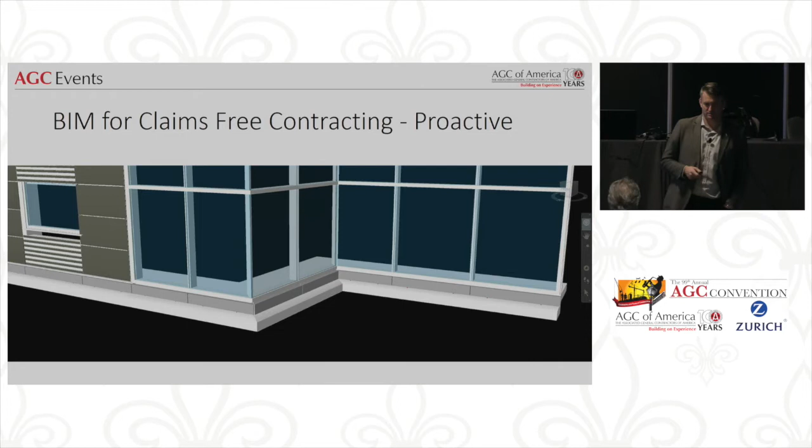But that was a very proactive way to approach it. So the biggest thing about being proactive is don't wait for BIM or VDC to be a requirement on one of your projects. That's like showing up for the test without studying. Start figuring it out before it's due, before it's required.

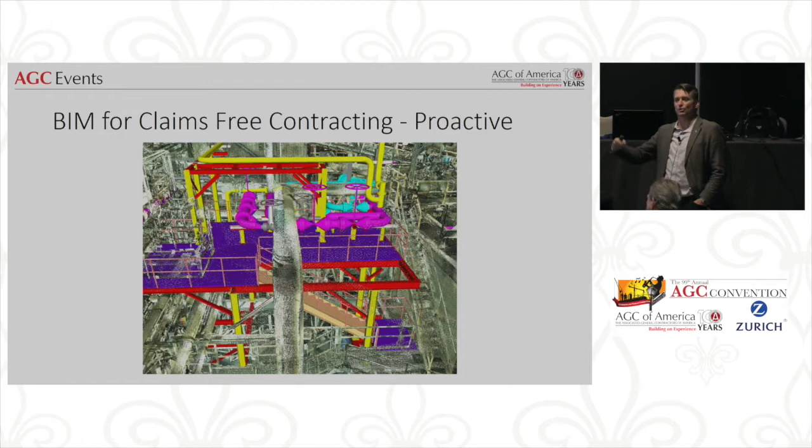Getting out there, showing the owner what the model looks like ahead of time. Laser scanning not as an as-built, but laser scanning as a proactive tool. How are things going to fit is a very significant, important thing to do.

Now, taking this to the owner was very significant and very important. It just made it that much easier to have that conversation. And all of a sudden, oh, it does make a difference. Because the owner wasn't trying to be a jerk or anything—they just didn't think it made a difference until we showed them a picture.

And that was in progress in the project. And so that's another thing—we didn't have to wait till the end to fight this out with an arbitrator. We were able to deal with it as we went, very nicely.

So that whole idea of the sooner you can deal with something—if you can take care of it before it gets real, before you cross that boundary of realization—the cost and the effort of changing it is greatly reduced and all of your conversations are easier. The best way to do that is with BIM and VDC, because you can actually see how it's coming together and find the issues faster.